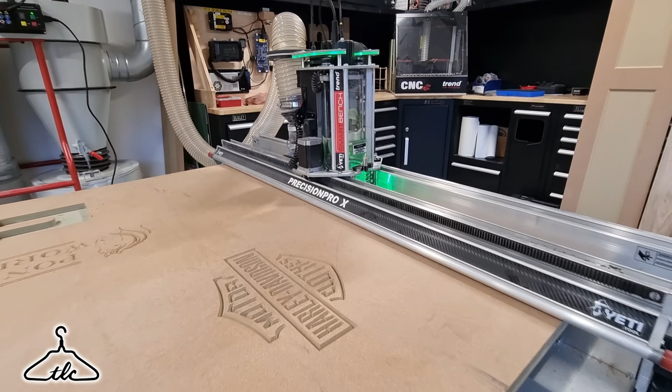Right guys, so this is the Precision Pro X. So we got the Pro X, we got the Pro Plus, and the Pro. All right, so here we go. We're gonna jump on making a file. Alex has literally just made a few bits for me just as a demo. So we've got, what's it, Vectric V-carve? V-carve Pro, so we're just gonna try and make a shaker style door.

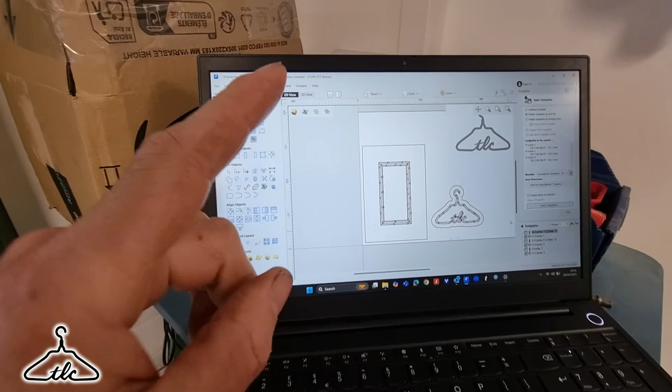It's got 2 rebates on this, so this is what I was talking about earlier. A 2 rebated shaker style door, and we've got my logo, so we're going to put that to the machine pretty soon. So this apparently doesn't give off any dust whatsoever. It's completely dust free. Well, maybe a tiny amount, but what you see is basically what you get. The extraction is fantastic on this machine. So we're going to be getting on with a little cut in a moment.

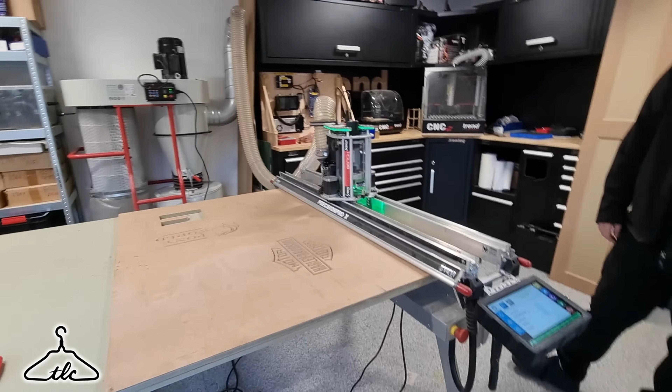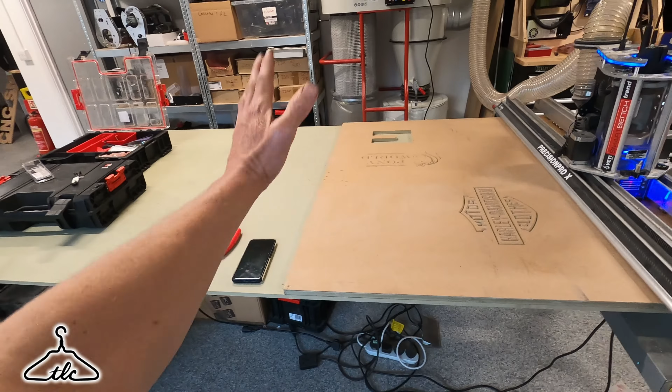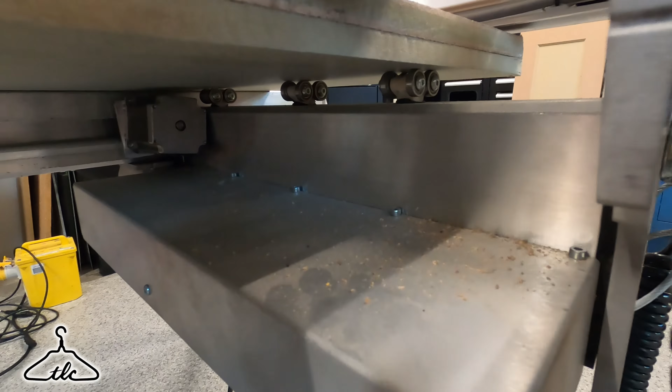And so have you sent that to the machine just yet? Yeah, so you can either transfer it by Wi-Fi from the computer to the console, or you can just do good old-fashioned USB. So the way this works, imagine you plonk on a bit of 6mm. It's twisted and bowed, whatever. You don't need to worry about that kind of stuff, because what this does is it squeezes it together. You can see the bearings, or the wheels, top and bottom, and it just squeezes your workpiece to the sacrificial board as it goes.

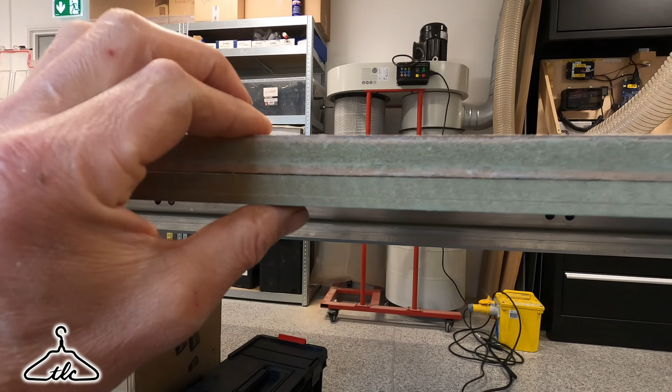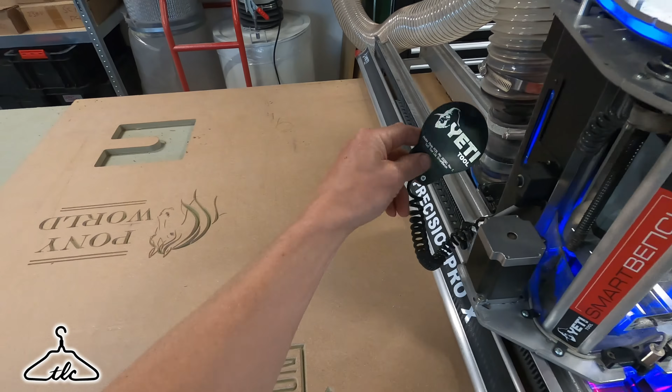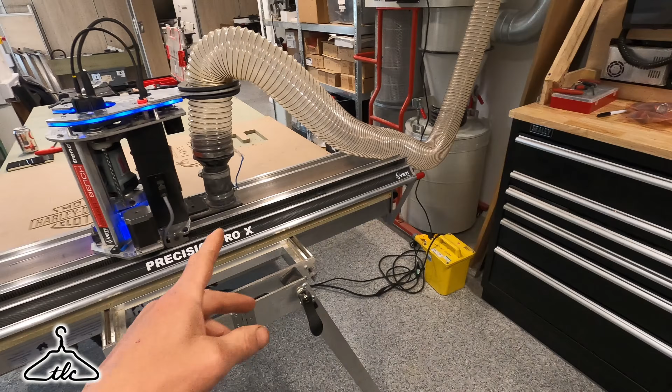As you can see a little gap there. It will squeeze it together as it's rolling across and doing its thing. It will just give you the perfect cut. It's got the homing plate there. What would you call this? Touch plate. It's got the touch plate in there. It's got the laser. Do you know what? Alex is the one to explain all the details. I'm not really doing this thing justice, but it is proper smart. We're going to go ahead and do a cut in a minute.

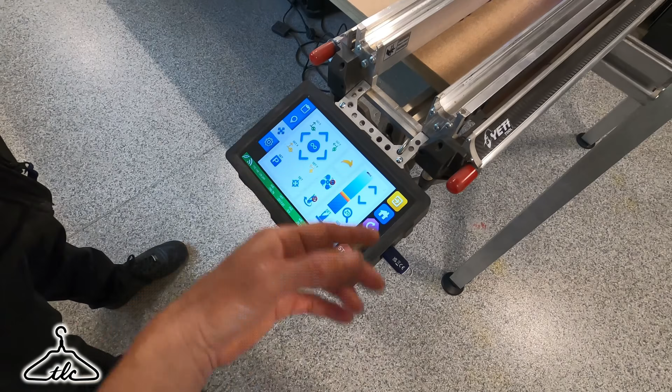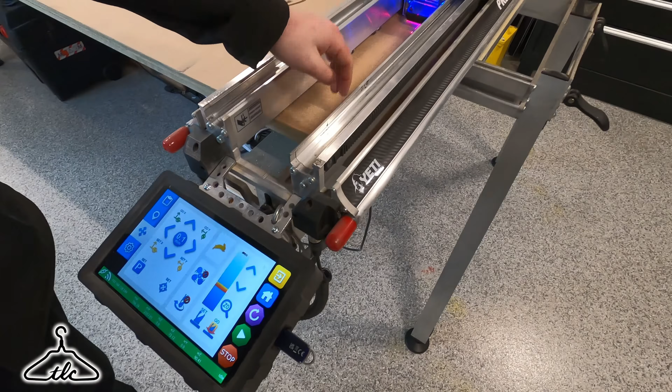Alex has just explained the window to me, how you can move it around in different increments, big, small, minute. 10, 1, 0.1. And this is the homing for your Z-axis. Yes, 0 off the cutter, so you know it's bang on the workpiece. That's fantastic. Right, I think it's time to get this thing whizzing away. Noisy, but it's gone. Health check, make sure it's getting data. And then it will come to this X and Y, and then it will carry on with the job.

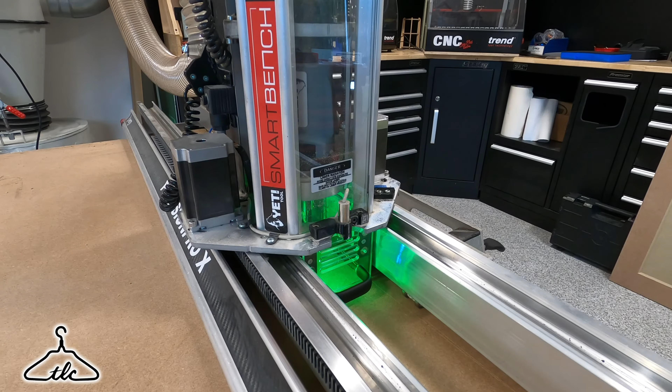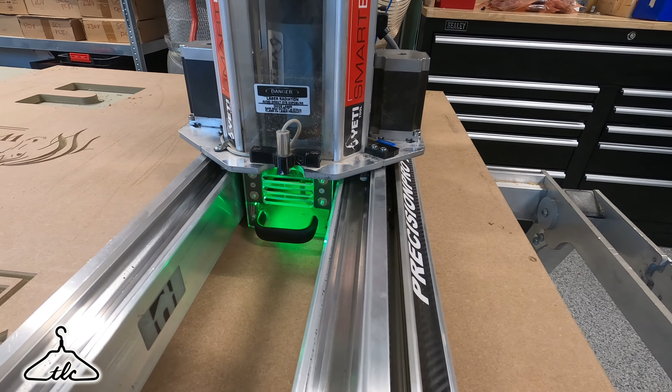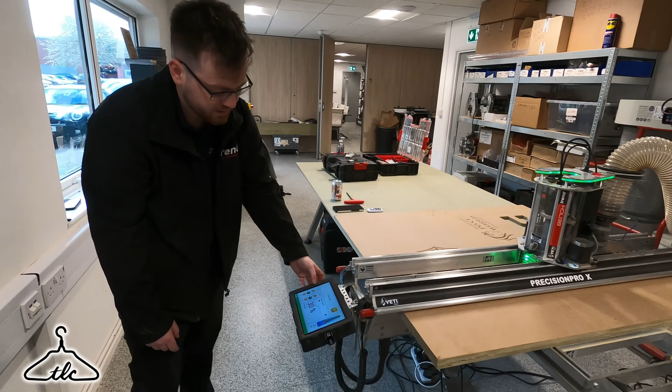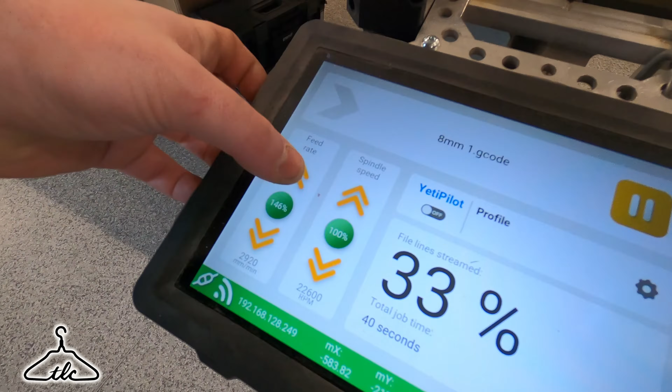Quite slowly, it's not making much noise. You can think, oh, this can handle a bit more speed. So on the fly, I can speed up the feed rate. So currently at 2,000 millimeters a minute. I can whack it all the way up to 3,000 if I want, or even further. Wow, that's smart. What I'm doing now is essentially what the Yeti Pilot would be doing if we had it connected and working. Same with the RPM.

If I think this could probably go a little bit lower, I can lower the RPM slightly, adjust it in 5% increments, as I said. We can tweak it so it's exactly right for the material that you're cutting. So we're doing this in 2 cuts, I believe? Two tool paths? 3 tool paths. So we're starting with the 8mm to clear out the bulk of the shaker door.

Yep. Then we're coming in with a V-point cutter to get our nice 60-degree angles like these ones. These are 45, but 60, and then we're going to do 2 layers for the multi-stage. Yeah, we've got that funky shape on the edge, haven't we? That's it, yeah. And then the third toolpath will be just cutting the door out with tabs on. Looking forward to that. Oh, there we go.

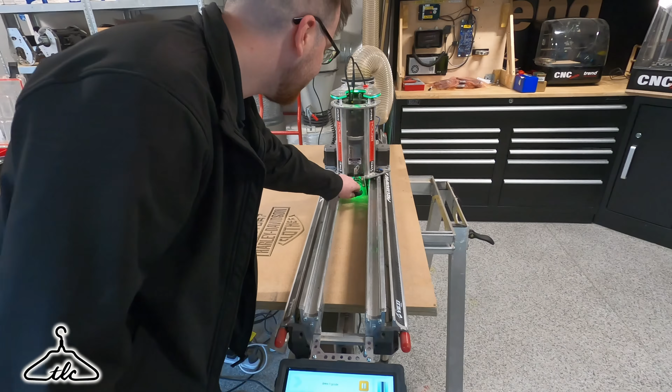Look at the dust. Anyone see any dust? I can't. That's good. You can't see a bit of dust, can you? Absolutely nothing. Nothing at all. It's basically a safety feature, but it essentially means stuff isn't able to escape anywhere. It's an enclosed system. Yeah. You're pretty much safe, but even if you're using a down cut where it's pushing the material down, you'll be getting at least 90–95% of the dust, even on a down cut where it's not extracting out.

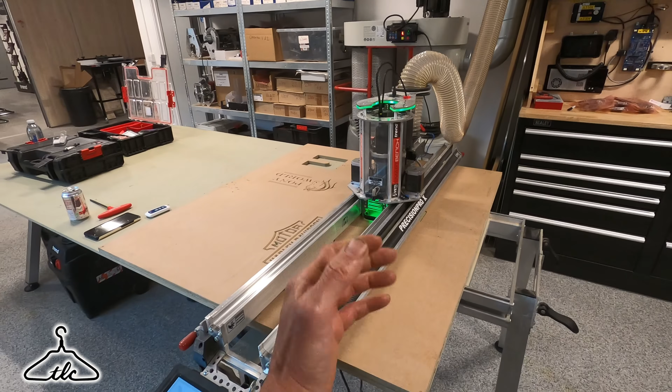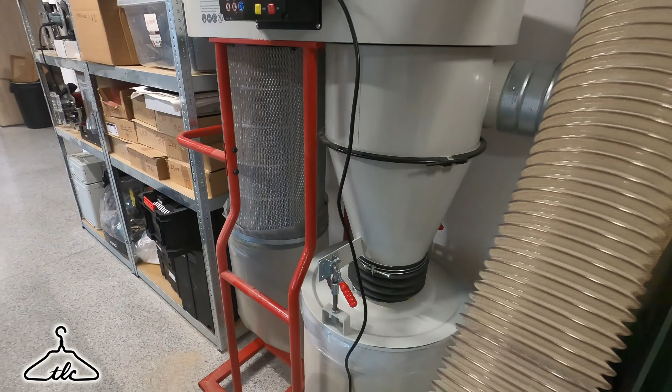When I see other CNCs and they've got the dust shoe, I still see bits coming off. Yeah. So this is completely enclosed. There's nowhere for it to go. No, it would just go straight out into the extractor. And of course, you can use any Hoover. Yeah, it's got to be a decent sized, decent flow rate on a big 100mm extractor. There's certain ones that will work better than others, but we can help you out.

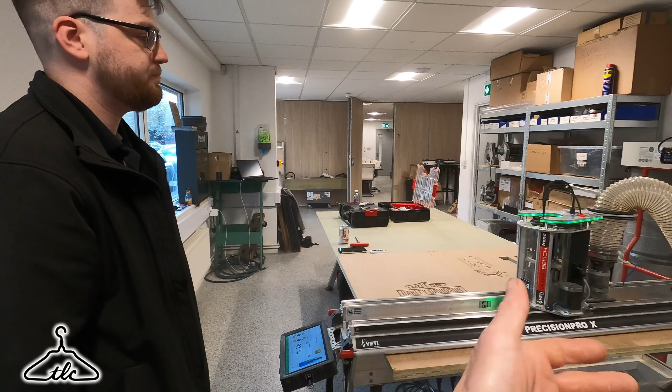But the CNC does accept smaller inlets. On the base models, it will use a 38mm, so we'll go into our regular TREND YETI 35. It will work nearly just as well. Obviously the limitation of something like a 38mm hose is if you're cutting a lot of plywood, you get nesting, and it might block up the hose, whereas there's way more space for it to go down. Yeah, I get you. And in the workshop, we have this, I believe it's the T35. We've got 2 of these. And technically, you can use the T35.

We are routering through MDF, so it's basically just dust rather than wood chips. So I'm guessing you will need something a bit bigger and chunkier, and the hose to be thicker if you are routering through hardwood. Yeah, if you're doing lots of plywood or you're cutting lots of foam or resin, sort of messy jobs, this is when this comes into play. Also, if you're a joinery shop, you've already got a system like this plumbed in with gated everything. You would just connect this to your system rather than having a sole unit. Yeah, I get you.

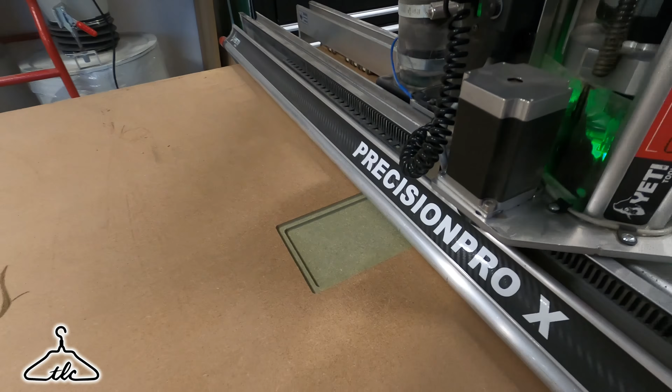There we go. We've done 1 bit. Cooling down spindle. Did it successfully do the job? Yes. First pass. Now we're going to load up the second job. Oh yeah, second job, because you're doing the door and the logo at the same time. No, hold on. So this will be doing the next stage. We'll finish the corners off, so you've got your nice square corners on a 60° angle. And then we'll also cut out the London Craftsman logo in the same job, because we're using the same tool. Combine them together.

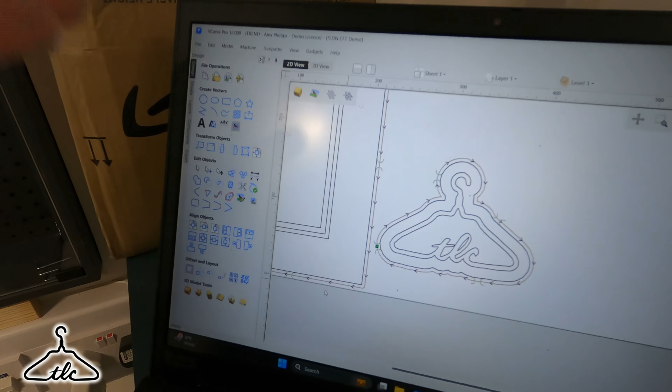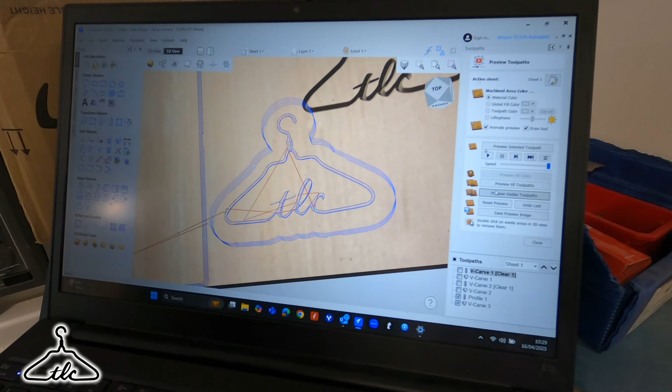Yeah, that makes sense. Can I just quickly show them that once more? This is obviously the famous London Craftsman logo. This is what the vector would look like. We can then have a quick look at a 3D view to see roughly what it's going to look like. If we just select the visible toolpaths, it'll give you a rough estimate of what your design is going to look like before you cut it. So we're doing both projects in the same go. That's what it's going to move on to in a moment. This is how you get a nice sharp corner without chopping it out.

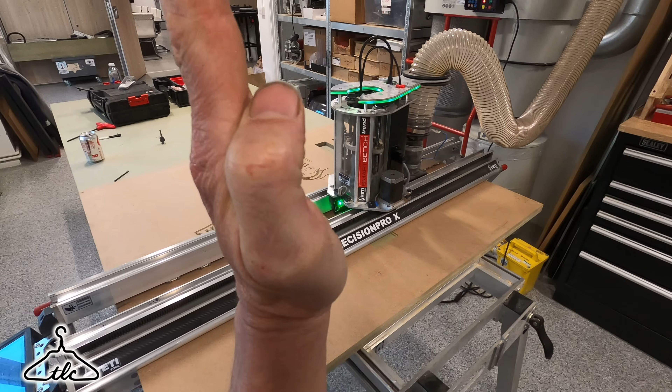A V-point. Yeah, is that what you call the cutter, a V-point? V-point cutter, right. You can just see now, well, I'll show you in a minute, but there's no chopping out to make things square. It's kind of like a little cheat by just having a very slight angle, you know, not 45. What degree is this? We're running 60°. You can do 75°, or if you want to get pretty much close to square, we do an 81° cutter, so to the human eye, it's not noticeable.

Yeah, do you know what? That's a fantastic idea. I mean, why not just get the CNC to do that for you and not have to chop these out and get a much better finish? Some people chop this out with a corner chisel, you said? Yeah, right. So you just need to chop that out by hand, but we're cheating with the V-point.

I mean, this is oversized. What degree is this? That's probably 45, a bit more extreme than you would do. Much more extreme, I'm guessing. But if that was less angle, say up to 81, like Alex was saying, you wouldn't really notice that, but you'd still get the sharp square edge. That's it, yeah. And why not? Because it's a CNC. You want to do as little manual work as possible.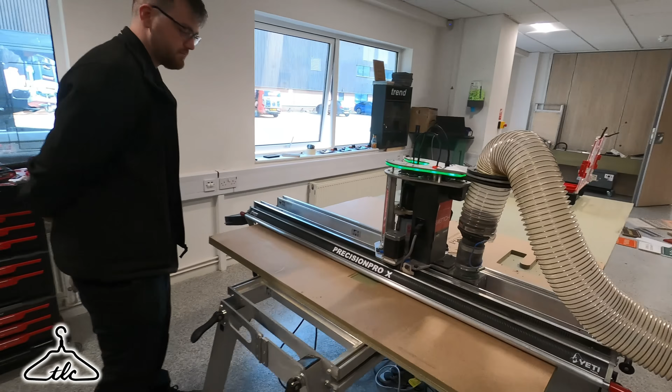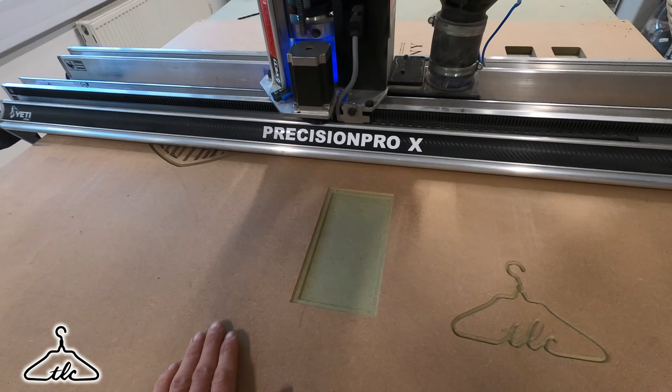Yeah, let's have a little walk around and see what it's done. So, because it's a mini door, it's for like a mouse or something. But that's great. But can you see the angles? What's this? A 70? 60? This is a 60°. So you can see the angles ever so slightly there. If you went a bit further up, you'd still get those sharp lines, the square. That's the bit that we want, the square corners. Yeah. For me personally, I would do that.

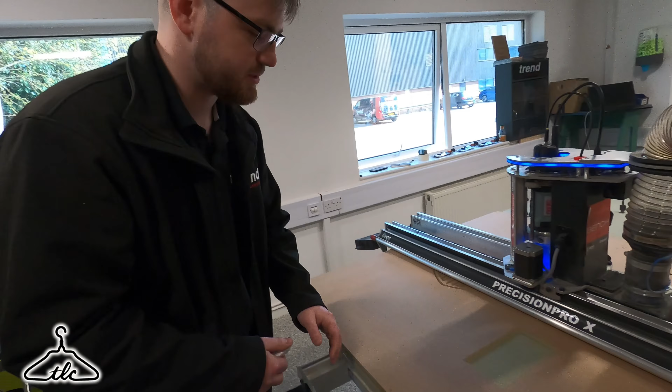We were talking also about the step over rate when it comes to milling this out with the end mill. Yeah, so this is done at quite a low step over percentage, so as you can see, you can't see any lines. Very, very slightly. I don't know if you can see the vertical lines there. Yeah, very small, very minimal lines. But compared to something like that, you can see them a lot clearer. This is obviously a higher step over percentage.

Have a look at that. Beautiful. Mini shaker style door with a double rebate, as requested by a customer, hence the reason we're playing around with that design right now. And my logo that's just there. Fantastic.

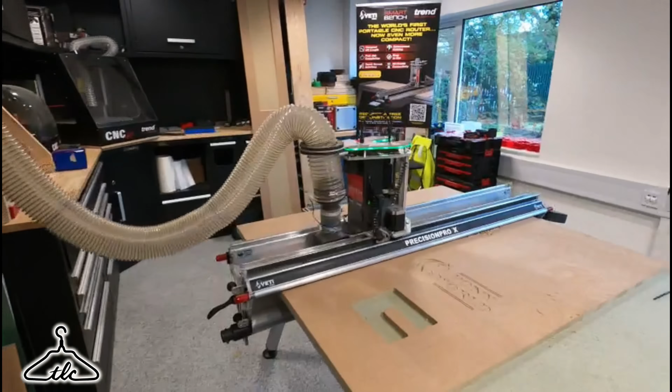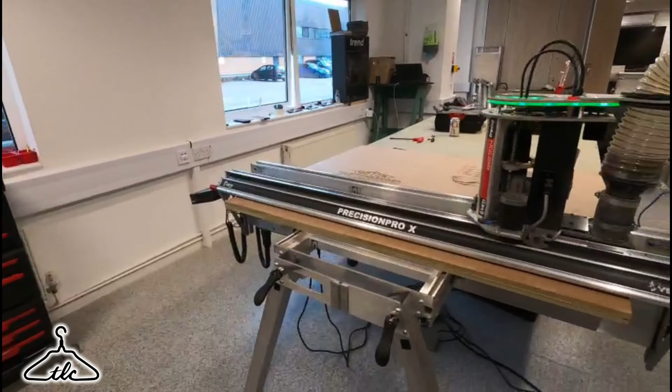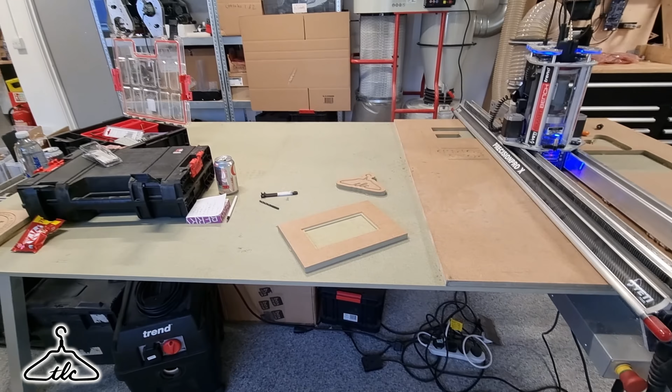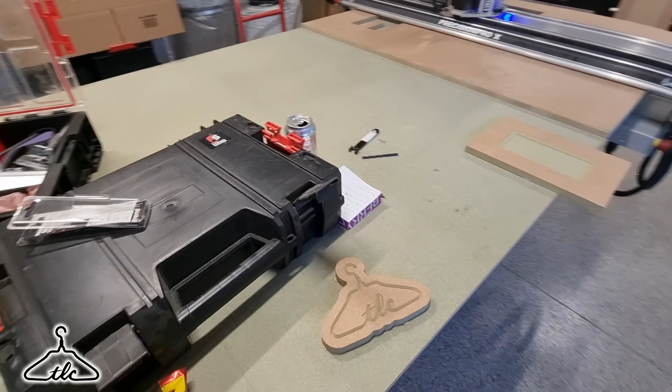Yeah, so let me show you what we've actually made today. We've made a sample shaker style door. Like I said earlier, I had a customer who wanted a double rebate style shaker. And here we go. We've done it in no time at all. And then let's move over to the little logo. We've used a V-bit and an end mill. Am I right there? Yeah, we can show them. So that's the V-bit and that is the end mill.

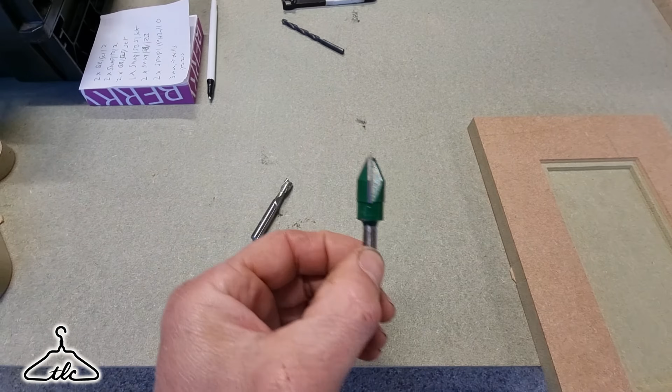Okay, so that's just for all your bulk removing waste. And then this here is to do the points in the corner, just to get that sharp corner. And same on there. That did that. Actually, we did use the end mill to cut that shape out.

Right, so we're digging through the samples box. Look what this CNC can do. MFC, MDF, Corian, softwood, foam, plywood, aluminium, leather, Velcro mat, solid oak. I like this one. This one is probably my favourite because I do like birch ply. We got laminated plywood, absolutely lovely material, acrylic, carbon fibre, look at that, make parts for your car.

Right guys, so it's time to go. I've been here for so long, Alex is probably getting sick of me. Been here for about 3 hours, but I know I'm definitely coming back.

I'm grabbing one of these tomorrow or the next day, so stay tuned for more content on this stuff because we're going to be making shaker style doors, drawer boxes, playing around with all sorts, designing files, making stuff, time lapses, everything like that. This thing is just a godsend.